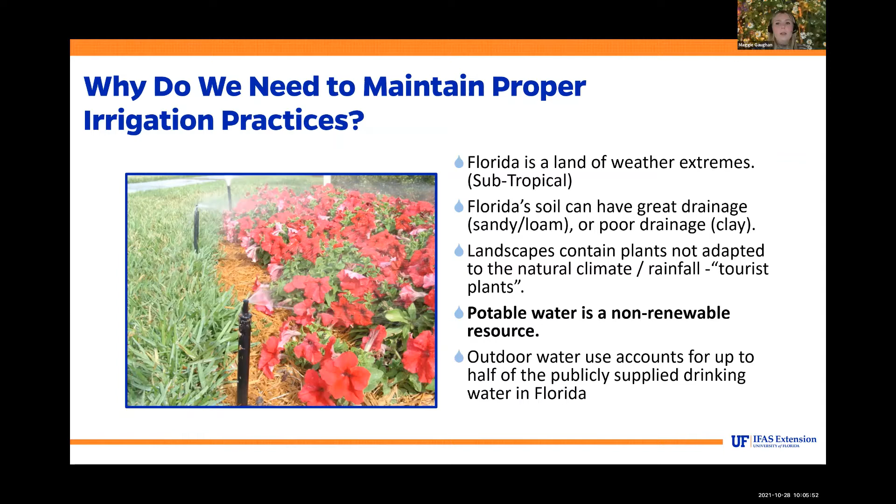So this does have an effect on the environment. This has an effect on our world. So we are drastically changing the landscape. So we need to be mindful of how we're using water because things are not taking care of themselves like they were before when we had all those wetlands that were able to filter everything out for us.

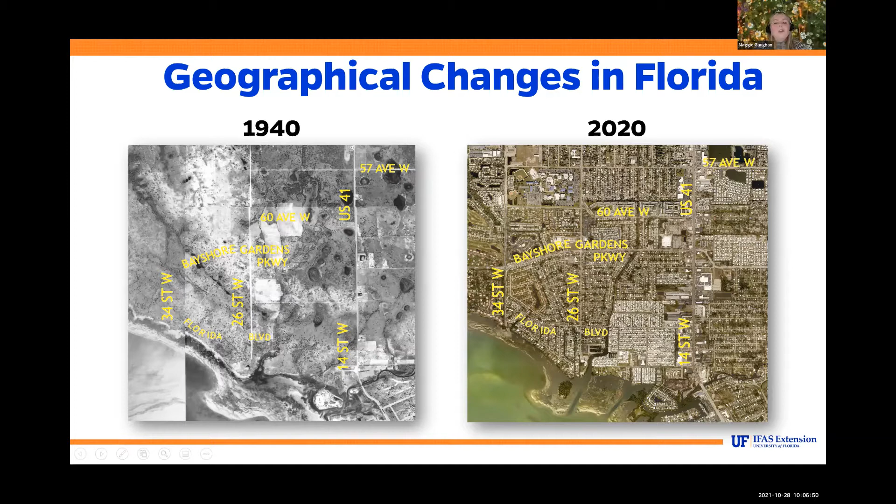And, you know, when we look at pictures of the globe, we assume that, oh my gosh, there's so much water, it's all blue. Well, really, that's all water. 97% of the Earth's water is salt water. And 2/3 of our fresh water is frozen in the glaciers. So we can't really access that yet. And then, of course, 1% of all the water on Earth is potable. So when it comes to irrigation, we really do need to be mindful.

And of course, I always like to remind people that it is okay to turn your system off. It's okay to go out there, turn it off, and then turn it on when you feel like you need it. But also, a functioning rain sensor will do that for you. So look for those signs of when to water. Pay attention to your lawn. You'll see folded grass leaves. You'll see that the grass kind of turned to like this gray blue color, or when you walk out in your lawn, your footprints kind of stick around. That's when you need to water.

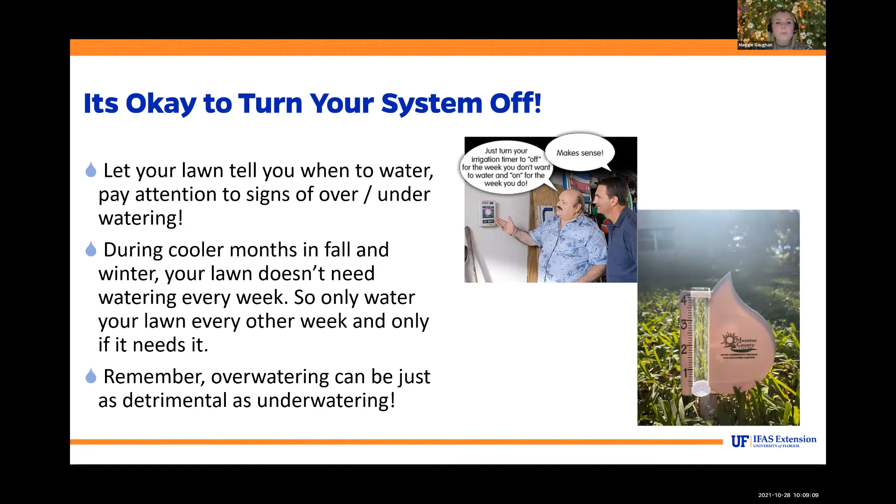So I want to ask this question, and I'm also going to ask it at the end to see how many of us remembered or learned something new, perhaps. So what is required by Florida law to be installed along with your in-ground irrigation system? All right, so it is Florida law to have a functioning rain sensor, or rain shutoff device, I should say. So rain sensor switches or other moisture interrupt devices, regardless of the age of your system, are required by law to be maintained and operational. So just because you have a rain sensor installed doesn't mean that you're good to go. You got to make sure that that thing works.

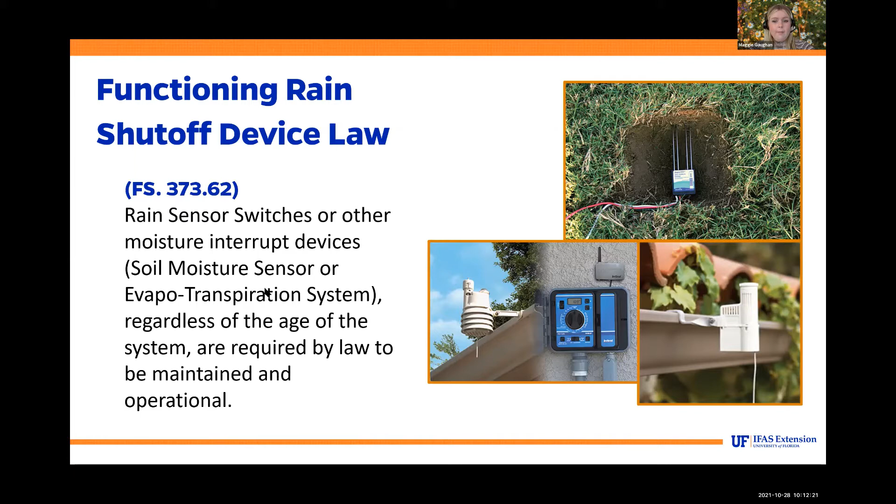All right, so why irrigate? Why do we even bother? Well, irrigation is intended to be supplemental to rainfall, yes, but sometimes we don't get enough rain, so therefore we need to irrigate. So when water is added into the landscape, it goes down, it gets absorbed by roots, but then it evaporates through the surface and transpires through the leaves. So rain ideally should be your #1 watering source, and we should be using irrigation as needed. So sometimes when we set things and just let it go, you might want to rethink that. Keep an eye on what's going on in the landscape, with the weather, and how much water you're really getting.

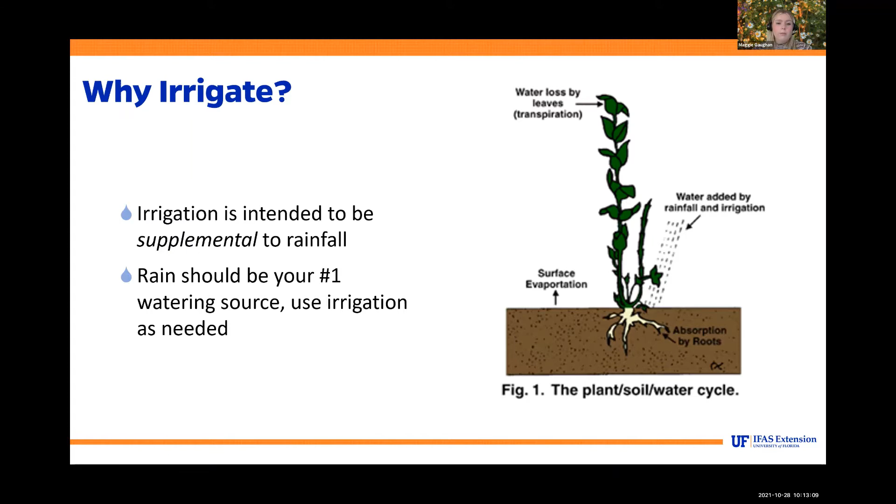All right, and here are some irrigation terms.

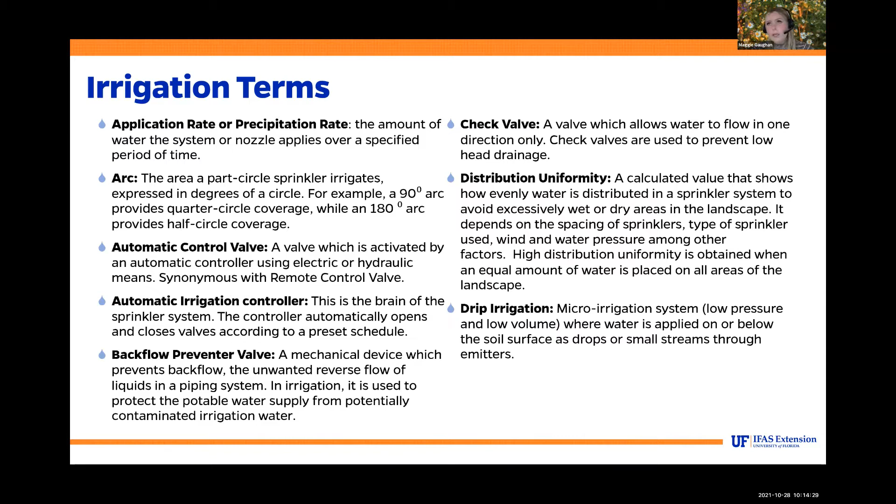So basically, it's just making sure that the water you've used to irrigate isn't getting washed back into your main supply that's going into your house. Nobody really wants to be drinking water that's been sitting out on your lawn, right? I don't think I do. So it's important to understand these terms before you start reading manuals or any design books or anything like that. You've got to understand what the terms are, right?

So here's some more. And one that we really like to use is head-to-head coverage. This is something we look for when we go out and do our inspections. This is the practice of placing sprinklers so that water from one sprinkler overlaps all the way to the next sprinkler head. This helps to increase overall system efficiency and prevents dry spots in the landscape. I'll go over this more with some nice graphics, but basically you want to make sure everything's overlapping so there's no areas that are missing that irrigation. You want to make sure everything's getting watered properly.

And micro irrigation, of course, love micro irrigation. That is a way to apply small quantities of water directly to or below the soil surface. This isn't typically what you want to use for turf grass, but for other plants, that would be a great option.

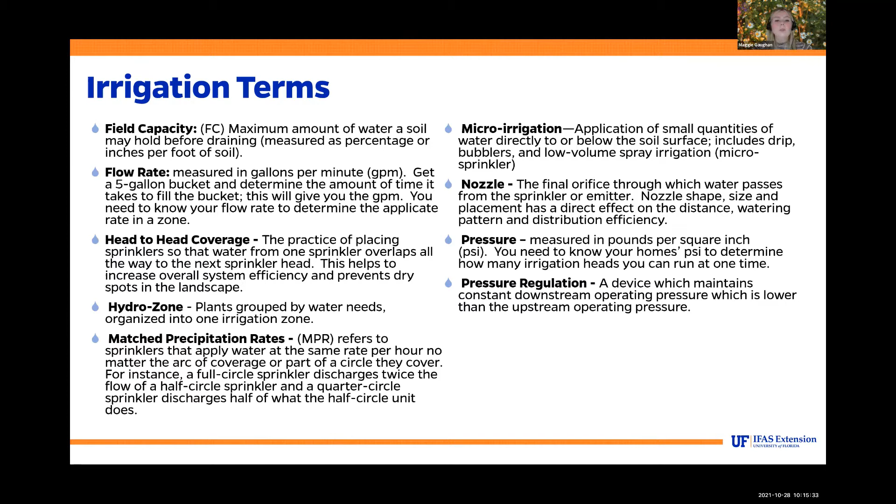All right, some more. Valves. Valves are pretty important for your whole system. They're kind of like the gates that let everything out, right? The valve is kind of like a faucet. They respond to commands from the controller. When valves receive the signal to open, water will then flow to the sprinklers and start to irrigate your lawn. When they receive another signal to close, they will stop the water flow.

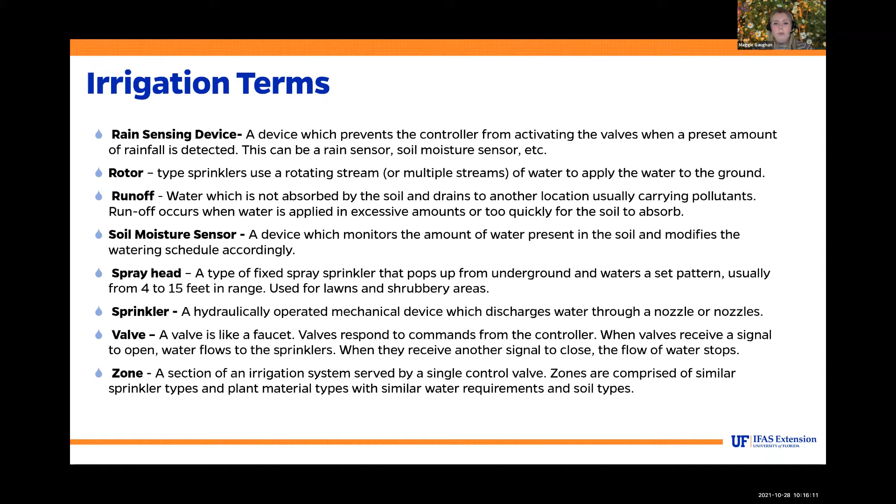All right. So a well-planned and maintained watering system will encourage healthy plant growth. It'll conserve water and also make your gardening life a little easier. If your plants are all healthy and happy and watered efficiently, you won't have to do as much. You won't have to worry about pulling plants out every weekend and replacing them. So if you do have an irrigation system right now, or if you're going to design one, make sure that you really think it through and that you maintain it as well.

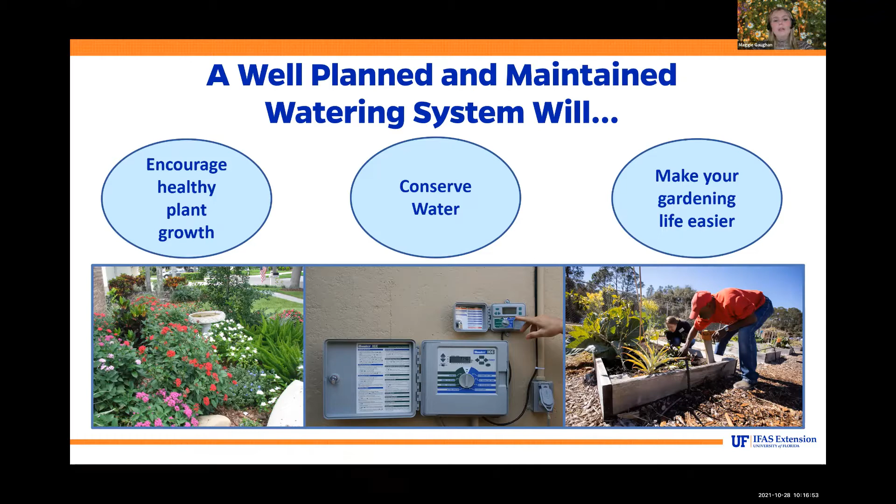All right, so to dive into the design aspect of everything, begin with the basics. You want to think of the bigger picture. What are the needs of your lawn currently? What are some characteristics of your soil, of your water source, things of that nature? So how much water do your plants really need? Some factors that determine watering requirements are your soil structure, soil texture, and plant needs. If you're putting in some Florida friendlies or natives, they may not need to be watered as much as some exotics or ornamentals that are not used to our landscape and climate.

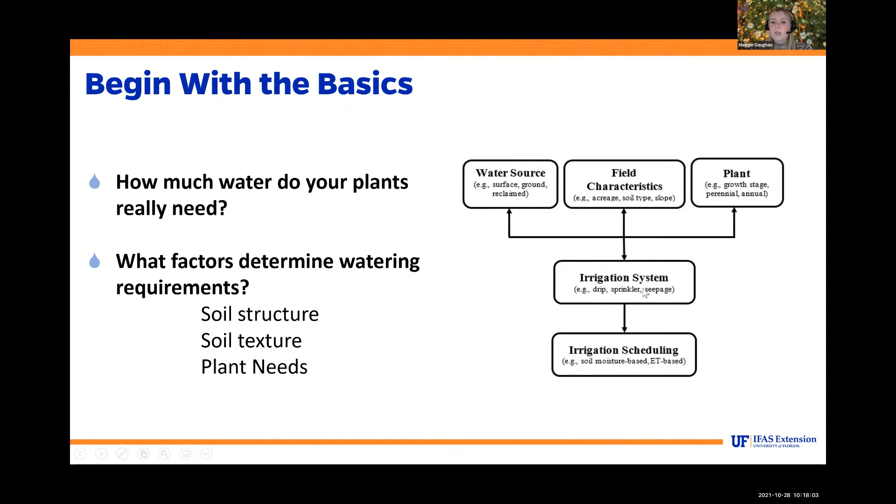So I really love this diagram here because it gives you a really good overview. You start with your water source, your field characteristics. You have a slope in your yard that might give you an indicator of where you should put heads, make them go downward rather than upward. Plants, irrigation system, and scheduling.

So some considerations for your irrigation system are system pressure. You definitely want to make sure that each zone is getting enough pressure to actually give you the output you're looking for, to make sure that it's going to hit that target, which is your turf grass.

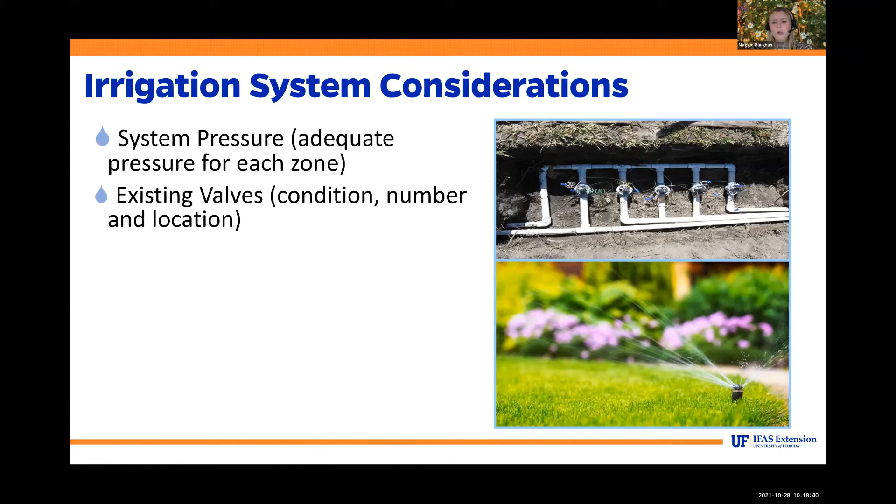So your existing valves can be a little tricky to locate sometimes, but typically in newer homes they are installed closer to the controller. Check out how many you have, check out the condition of them, and make sure they are functioning properly. And electrical wires, make sure you know where those are so that when you dig, you're not going to hit any and spark anything.

And how many zones, how many irrigation heads are within the zone? This is something you will need to do a little math about, and we'll get a little bit deeper into that. But basically you need to know what the pressure is and the area of your target.

And your controller, there's a lot of controllers out there, so go with one that you understand how it works and that maybe fits your budget. And your rain sensing device, make sure that you get one of these before you put everything in.

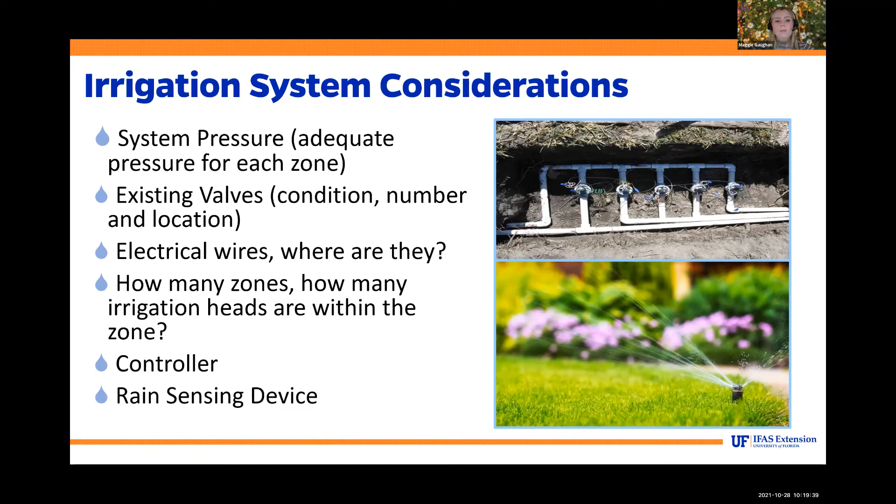Something also to consider is Florida-friendly landscaping principles. Watering efficiently is one of the major components of a Florida-friendly landscape because this will help to reduce stormwater runoff and protect the waterfront.

Soil texture is going to be a major component that affects the way you're going to design your irrigation system. So if your soil is really clay heavy, you may want to look into adding some more organic materials to improve drainage. Sandy soil has really great drainage, so things typically flow through sand quicker than they would clay. Loam is basically what you want—that's your ideal soil, and it has both clay and sand in it with organic material as well. So we want to shoot for loam, but it's okay to have some sandy and a little clay in your soil too.

Sand has big particles, so it's going to be better for drainage—water will flow right through there. Silt is small, kind of like loam. And clay is not the best for drainage; it's very tiny particle-wise, so it's not going to be that great for drainage.

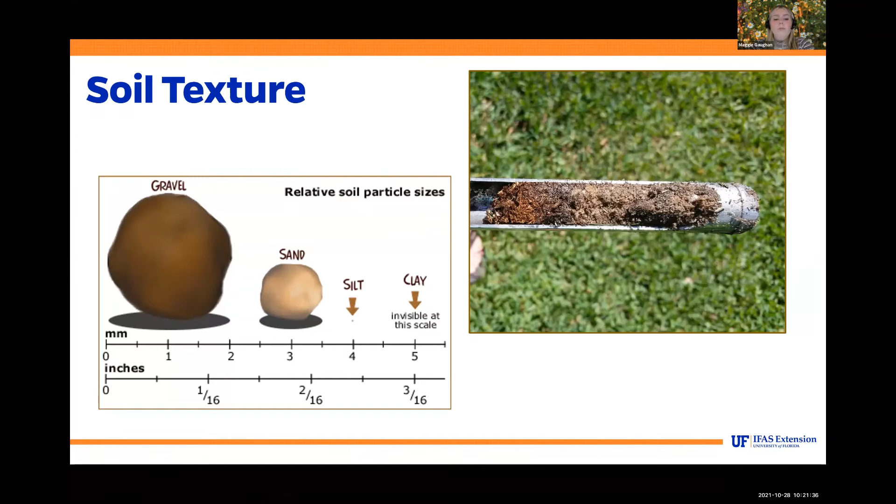And this is a soil core. So the mobile irrigation lab, when we go out, we do a soil core of your yard to see what you're working with, and sometimes we make our recommendations based off of your soil. So why is this important? It determines how the water penetrates the soil and how much water will remain in the soil.

With clay soils, the water typically stays at the top. With loam, you get that sweet middle where it goes down, but it goes a little wide. And sandy soils typically just go right down, right through it. So we definitely want to go for that medium middle ground.

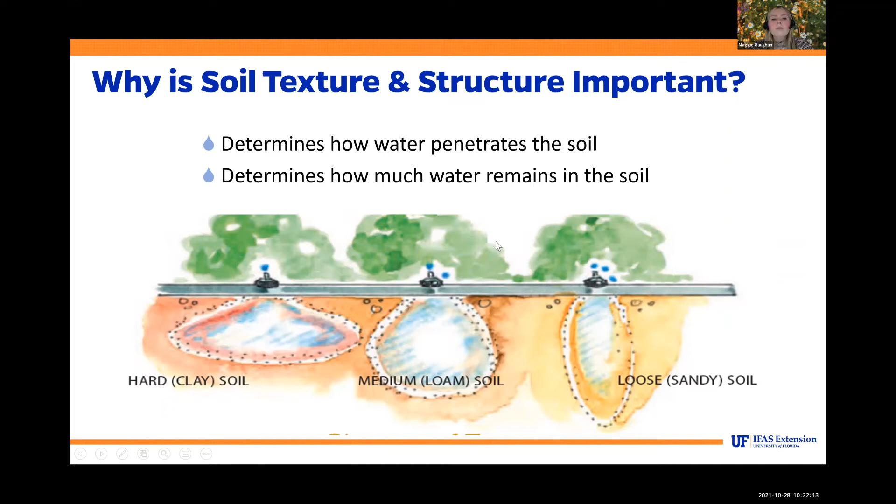And you want to consider composting. I think composting is great and more people should do it. We just started composting at my house, and I've been using a little bit of it on landscape plants, and they seem to like it. Compost is created when microorganisms break down organic matter like leaves, grass clippings, and kitchen waste. It basically adds more nutrients and texture to your soil than was previously there. So if you have sandy or really clay soils, I would definitely recommend laying down some compost.

All right, so you've got the plan for your irrigation system and you're ready to start digging. Well, before you start digging, you should call 811, because this is a free service that will locate your utility lines. This is what you want to do right before you're ready to install and get going on everything. It's important to call this number so that you don't damage anything that could really draw out your whole design and installation process a lot longer. So call—it's a free service.

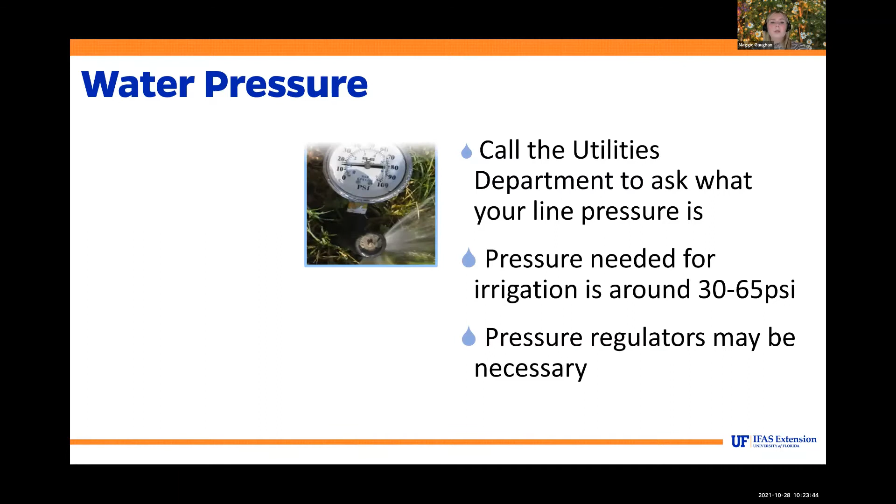All right, so water pressure. This is a super duper important aspect of your irrigation system, and a major component you need to consider when designing your system. This is going to tell you basically everything you need to know about your irrigation design and system. So call the utilities department, ask them what your line pressure is. They usually will know, and the number will differ depending on which jurisdiction you're in—Manatee County, City of Bradenton, whatever.

Pressure needed for irrigation is around 30 to 65 psi, and pressure regulators will probably be necessary. You don't want too much pressure in a zone, to where nozzles are popping off, and you don't want too little pressure, to where water isn't able to come out.

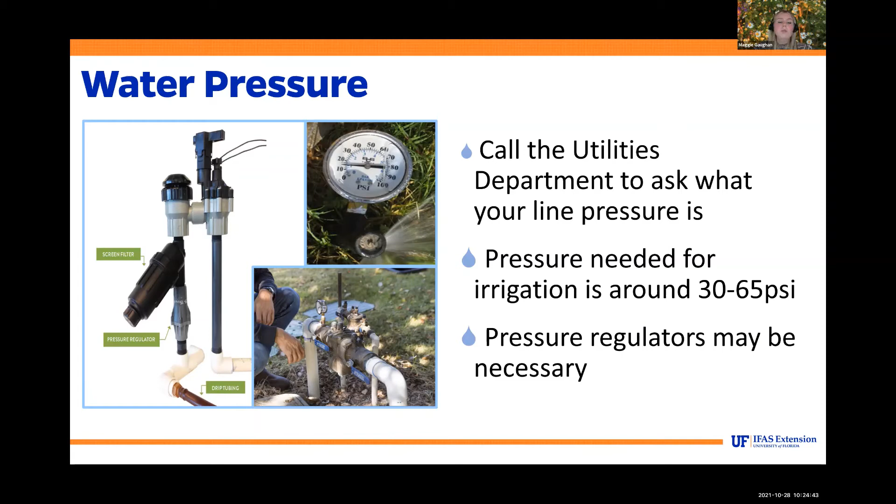This is where we're going to go a little more in depth on how to determine how many zones you should have. First things first, you need to determine the area of the portion of your lawn you'd like to irrigate. Area equals length times width, so length times width of that area will give you that number.

With that number, you need to find the gallons per minute, GPM, that the zone can handle. Your GPM is your area times the precipitation rate of the nozzles you're using, divided by 96.3, and that will give you your GPM.

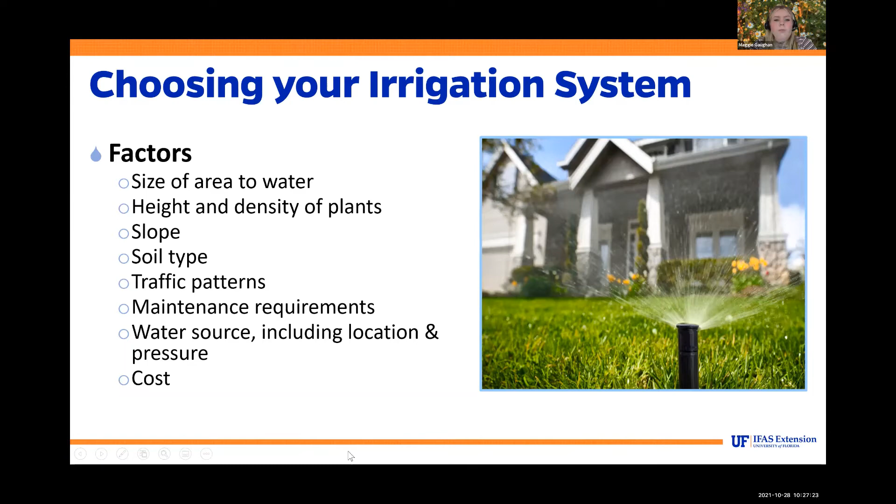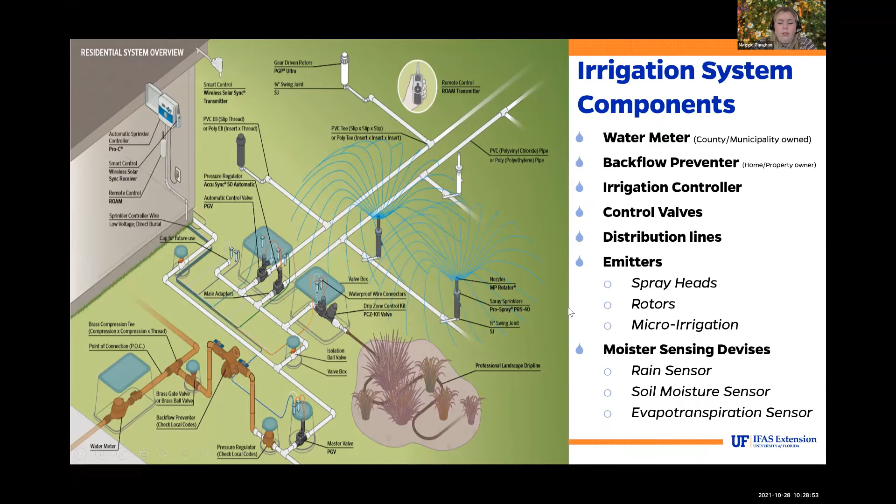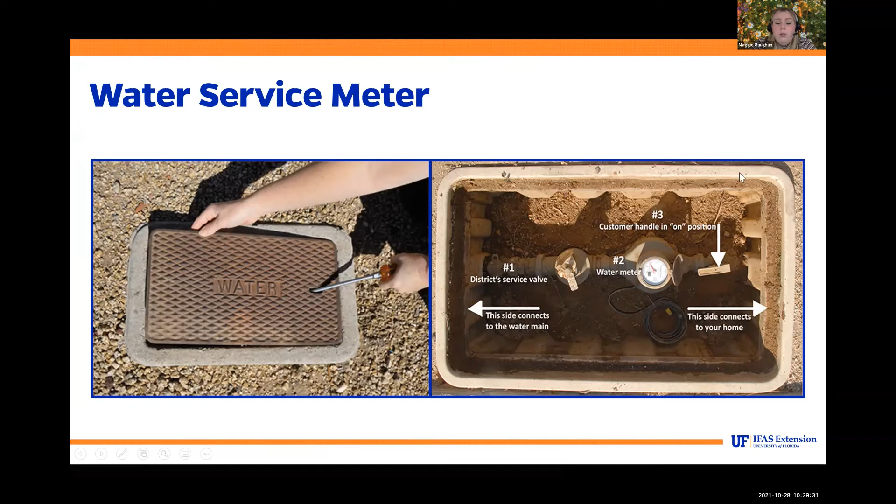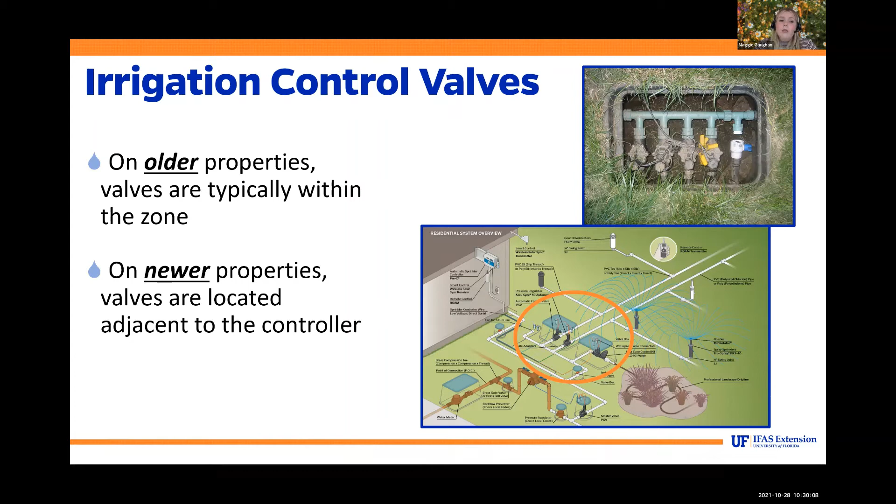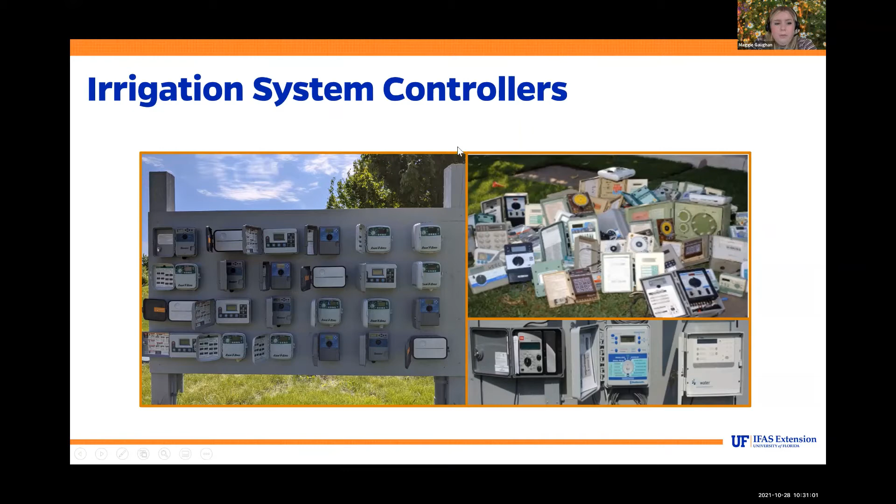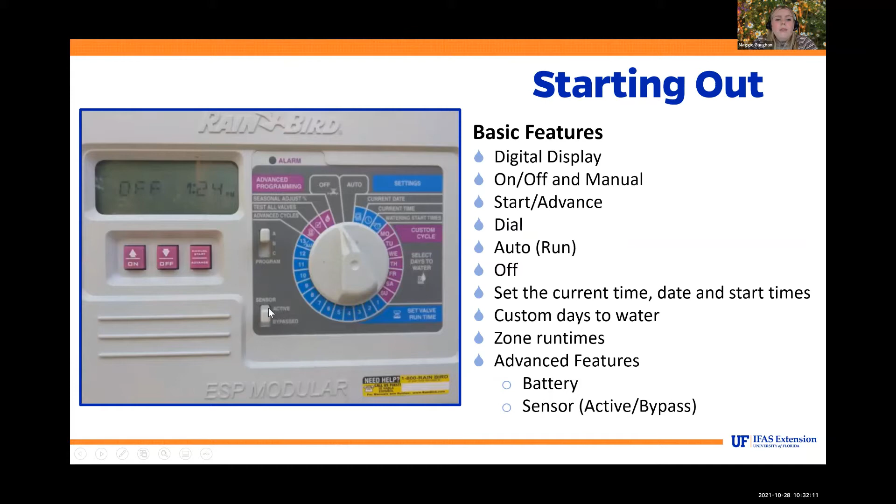Okay, so starting out, this is one of the most popular controllers that we see when we go do our mobile irrigation lab appointments. This is the Rain Bird ESP Modular. The basic features of this: we have a digital display, there's an on and off manual, you can start and advance your zones typically with a dial, there's an auto setting, there's an off setting. You can set date and time and set your days. So let's dive in a little deeper to the controller.

So, auto. With this setting, this will operate all existing programs entered automatically. So you have program A, B, C - some controllers will have less, some will have more. All programs contain start times, run times, and watering days. For a residential lawn, we really only need one program. There are options for different programs because maybe nurseries or larger farms need to utilize different irrigation times, but really we only need one when we're dealing with a residential irrigation system. So just be aware when you set this to auto that you know what your program settings are, because sometimes we have this on auto and we don't realize that we have every day set to run our irrigation system for like 3 hours. So just be wary of turning it to auto - make sure you are comfortable with your controller and that you know what is going to happen.

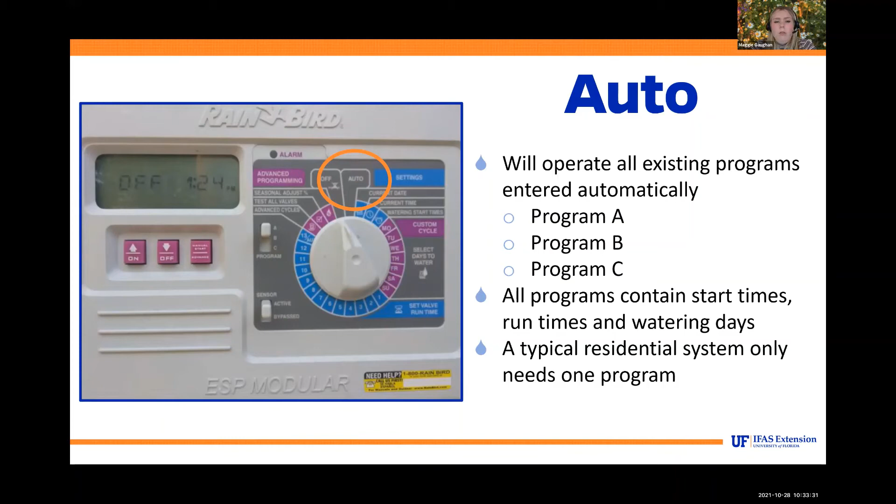All right, so current date and time - this is an important feature because you want to make sure that your date and time are correct. Otherwise, you may set your system to run at 5 a.m., but really it could be coming on earlier or later than that. If your date and time are wrong, it just may not be coming on when you think it is. So ensure that your date and time are right.

All right, and your start time. To adjust that, you would move the dial over to the start time, and then you would either add time or go down on the time using those arrows, the on and off / up and down arrows. So watering start times on a given program - there should be no watering between 10 a.m. and 4 p.m. Your ideal start time we typically recommend is like 5 a.m., so then your system should be done running by like 7 a.m. when the sun is starting to come up. You just want to make sure that water isn't evaporating - that will happen if you're watering midday. So early morning is what we recommend to be the best.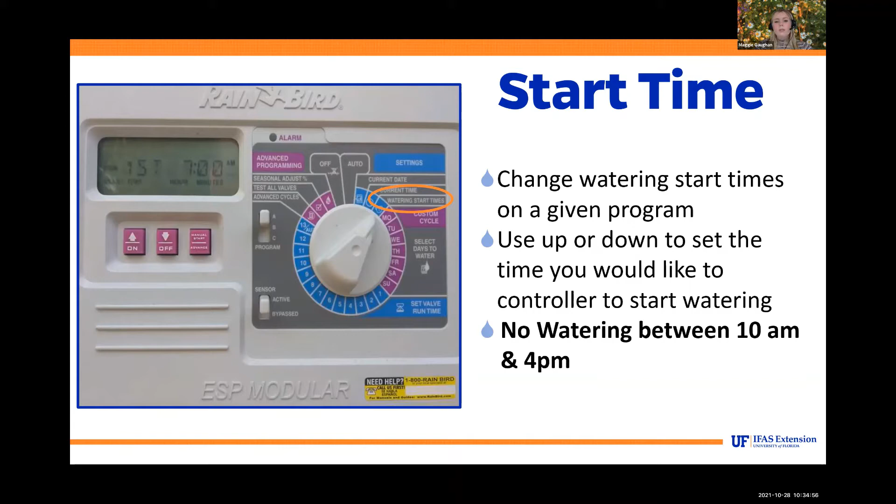So selecting your watering days. Depending on your address, your house number will determine what days you are allowed to water. If you have a house number ending in an odd digit, you can water Wednesday and or Saturday. If you have an even number house, you can water Thursday and or Sunday. We say 'or' because really once a week for most of the year is fine. These water restrictions are put in place by the Southwest Florida Water Management District, and they are the body that governs our water for Manatee County.

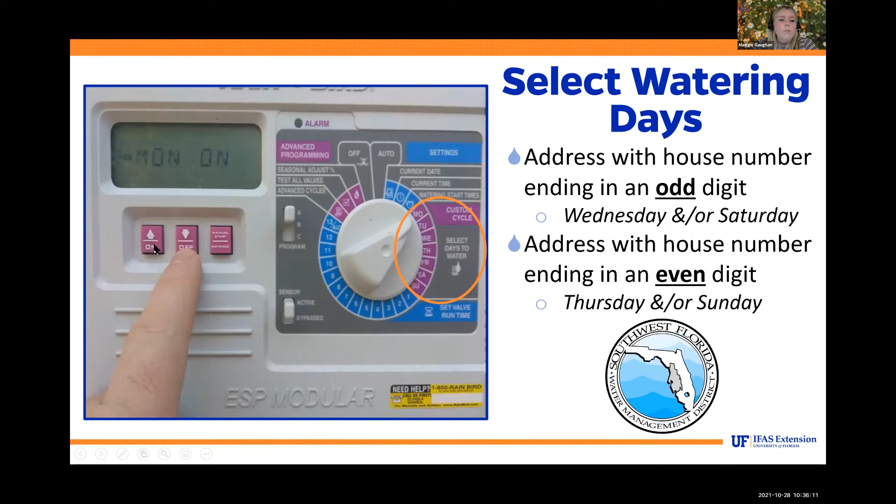Make sure when you're going to select watering days that you are going by these watering restrictions. How you would do that is just slide the dial over on this particular model, and then you either will turn on or off. Press the up arrow to turn it on, the down arrow to turn it off.

All right, so setting run times. You want to change run times for each zone. Each zone will be a little bit different than the next, right? Make sure that this is specific for your zone and it's not just a golden number that they say rotor should be 60 and spray head should be like 30. Well, that's not always the case. If you have a tiny little square, you should never be running it for like 60 minutes. That's a lot of water.

This controller can actually hold a lot of zones, up to 13 zones, and it's different for everybody. So how to determine your zones: you have your controller, and usually either behind it or underneath it there's a little cover you can pop off and you can see all the wiring. There'll be some wires that are connected and they'll have numbers above them, and those are typically your zones. The digital display, when you go to select the zone, will either show the zone number or refer to them as stations or valves, and it'll say how long it's running for. Of course, you can change that with those up and down arrows.

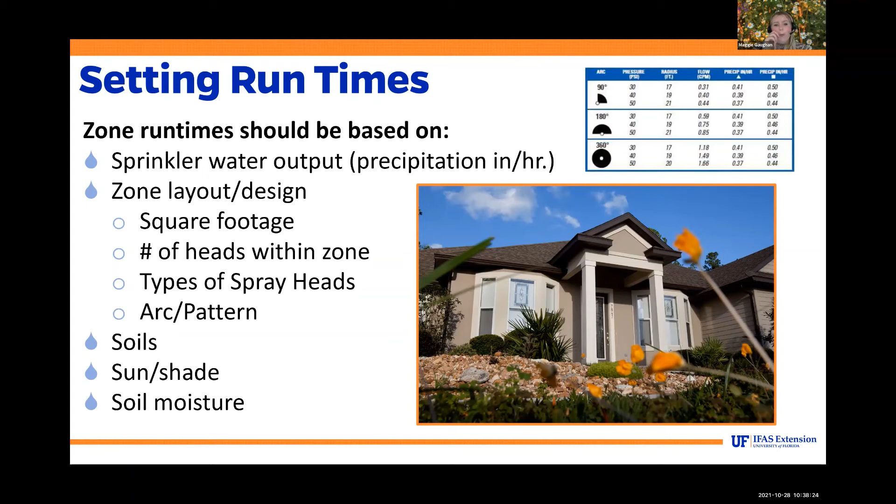There is a fairly easy way you can do this—you can calibrate your own zones. Most of us have those cupboards that you open up and Tupperware just pours out, right? So I'm sure you have some of these at home that you can use to calibrate your zone, or you can use some tuna cans. It just has to be something with a flat bottom that's fairly shallow. Or we have something similar to this, kind of little collection cups that have a stake in them, so you can stick them in the ground pretty easily, and then they have a measurement on the side so you can see how much water is being collected.

What you do with these is per zone—you don't do your whole system at once. You're going to set cans or cups by each head in the zone you're calibrating to catch the irrigation water. Keep your irrigation on until the cans or cups collect three-quarters of an inch of water. I would do this in increments of 10 minutes so you're not wasting too much water, and check them so you can see how long it takes. So if it took you about 5 minutes to collect a quarter inch, you may want to multiply that by 3 to get 15 minutes, which will get you to three-quarters. So this is kind of a fun little way you can calibrate your zone.

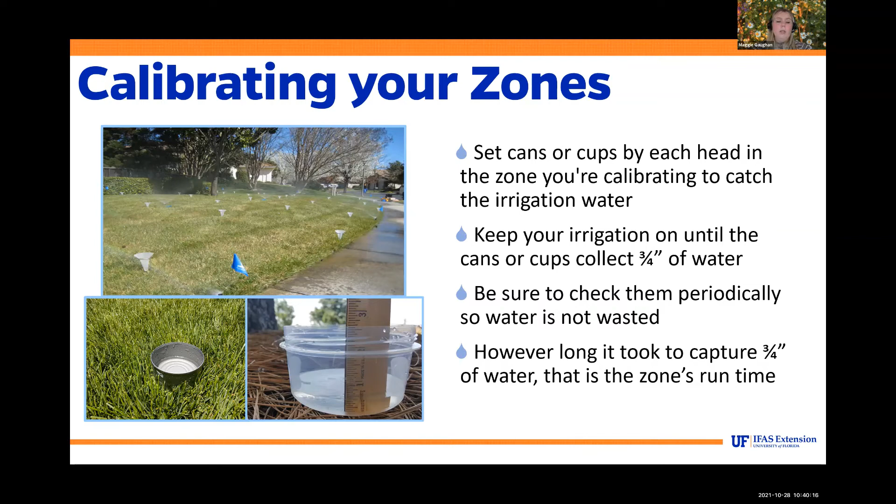It's important to calibrate your zone because you do want to make sure you have uniform coverage. For good coverage, you want 100% overlap of the heads. Lack of 100% coverage may be due to improper head spacing or wrong spray head throw distance, kind of like in this picture here. I did not put this here as a good example—it's just kind of a bad example, and I see this a lot, unfortunately. So you have rotors in this yard when ideally it should be spray heads because of the way everything is shaped. This spray head here is kind of going over the sidewalk but still watering the sidewalk—that sidewalk is drenched. And this rotor in the back corner, kind of catty-corner to the garage, isn't really getting much.

So unfortunately, this isn't getting good coverage, even though the grass is green, but maybe it's been rainy. Really not great coverage there.

Lack of 100% coverage may also be due to not enough heads in the zone. And if your water pressure isn't correct, if it's a little bit low, then it's not going to be emitting as properly as it would if you had proper pressure.

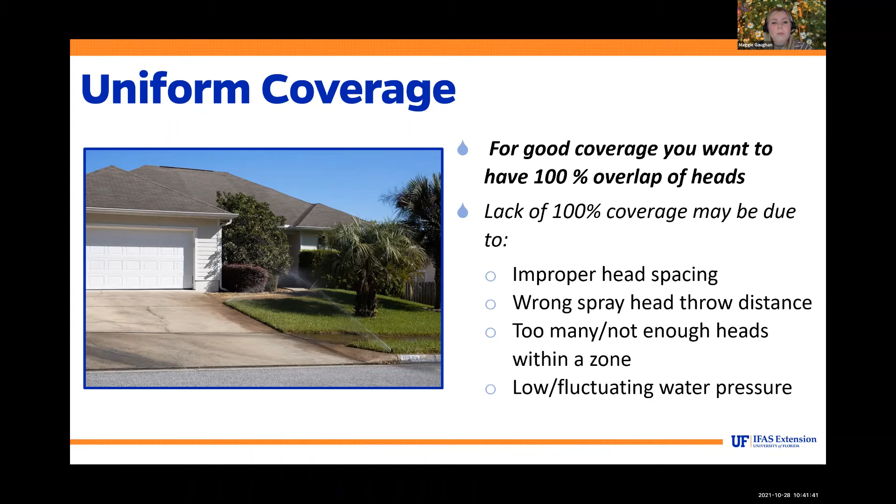Okay, so question number 2: what type of irrigation is best for landscape beds?

All right, so this is a great graphic of an effective irrigation zone. You can see how the design is very efficient in the way that these zones are structured. Typically, you want to group the different corners and areas of your lawn together. So you can see area A, zone A, is not paired with D - they're separate zones. Because if area D and area A were one zone, there's no way this backyard would be getting enough irrigation, enough pressure to irrigate properly.

And this also is showing you the head-to-head coverage. So let's take a peek at area B. These gray circles are showing us sprinkler heads, and it's showing the throw pattern that they have. This looks like it's a 270 that's going around. And then you also have one across from it that's meeting it, and another one over to the left that's meeting it around that bush there. So everything is overlapping. I know it can be a little tricky to look at all these lines, but you can get the gist and see how they're all overlapping.

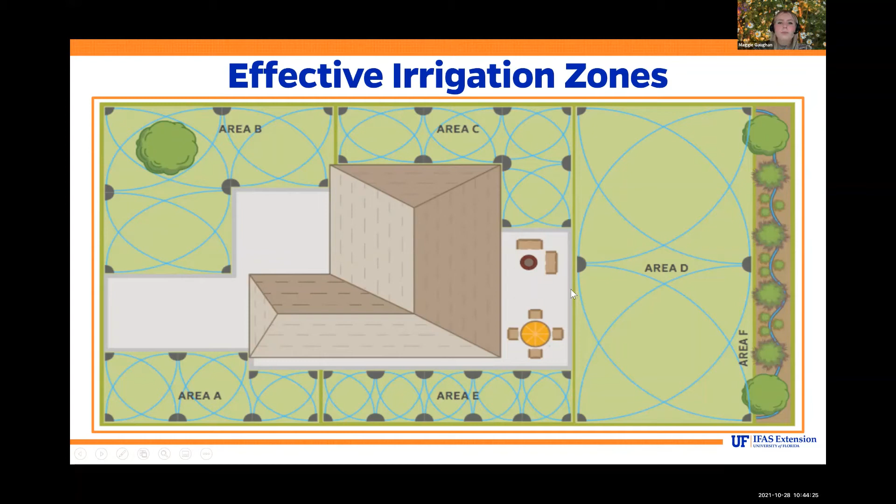Some more graphics for head-to-head coverage. So in the middle here, we have some 360-degree sprinklers that are creating this full circle. And then we go to the top left, that's about a 90-degree sprinkler that's hitting it from the side, 90 degrees. Then you have another one in the other corner. And then you have your 180s creating a half circle. So you can see that there aren't any spots that are not getting irrigated. Everything is getting covered and saturated with irrigation.

So visually, when you see it out in your yard, you're going to see the water hitting one head and then hitting the other.

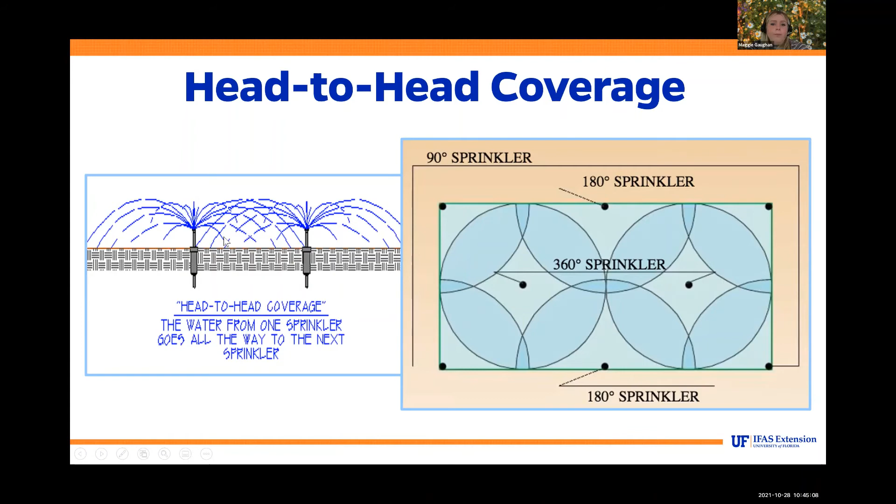All right, so potted plants - sometimes people put micro irrigation in potted plants, but depending on the size of them, you really just should hand water them. Potted plants hold more water because they're in a pot. So to have it regularly irrigated with micro irrigation may not be as beneficial to the plant as you think it is.

In the landscape bed here, use micro irrigation as needed. So this landscape probably doesn't need any because you have some natives in there and they're pretty established. Established landscape plants don't need to be watered like your turf grass does.

And of course, for turf grass areas, you want to use spray heads or rotors. You never want to use the drip line or micro in the turf grass area because it will get a little splotchy and it will not be efficient and make it green and pretty like we want it to be, right?

All right, so let's dive into spray heads. These are fantastic, great for a typical residential lawn. Don't get me wrong, these are great, but also they are using more water - they are still using a good bit of water. So just be mindful of using these as well.

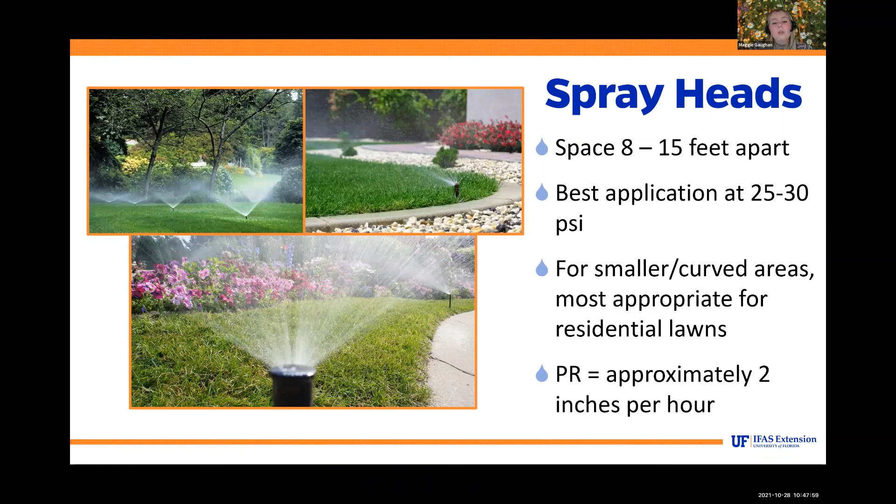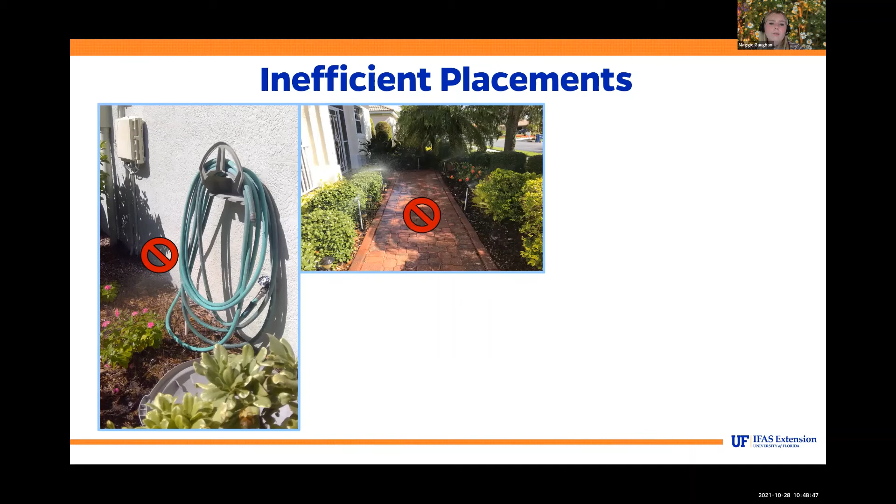And this is really common. We see this quite a bit along a walkway in landscape beds again, but there is a lot of water going onto that hard surface that isn't gonna help it get any bigger. And then blocked by a plant. This happens a lot. Just be mindful of where your heads are and where you put plants. And also, this plant probably isn't going to like being irrigated over the long term.

And along sidewalks in these strips, there's special nozzle tops that you can get for sidewalk areas that are called S strips, and they typically shoot out more so like a bow tie, so that you're not getting that full fan, you're getting more so of a tighter spray that's just going to hit the grass rather than the sidewalk and the road.

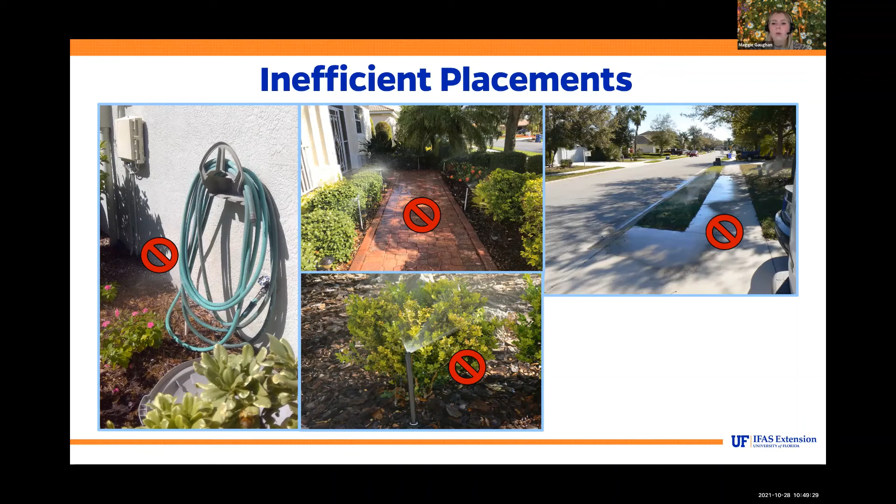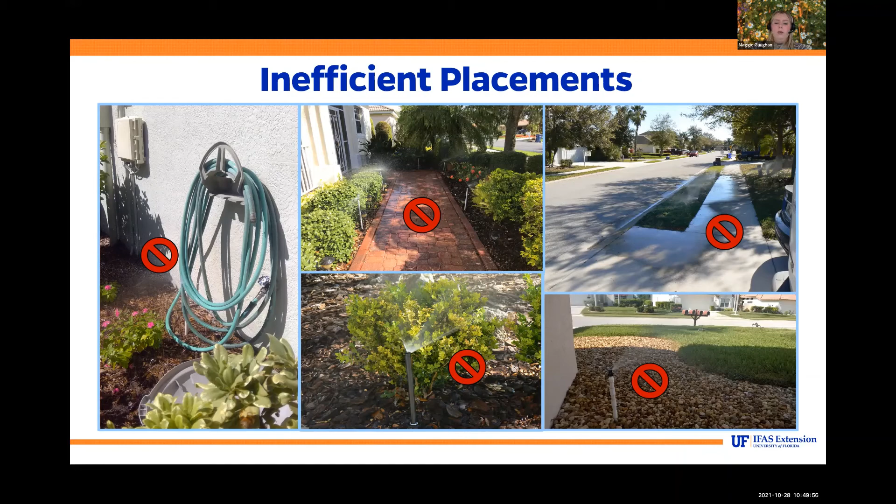And here's another one, rocks. I'm not sure what they are trying to grow in the rocks, but that sprinkler isn't going to do much for them. So just be mindful where you're installing your spray heads. Make sure that they're not being blocked by any objects, that they have a purpose when you put them in. And remember that their purpose is to irrigate the turf grass. All right, so let's dive into rotary heads.

All right, so this is a rotating sprinkler that is better suited for large open areas, using a higher pressure to disperse water in an arching stream type jet spray. So rotors, you want to space, this is a pretty large bracket of numbers, but 15 to 100 feet, definitely more than 15 feet, I would say. But these are best applied at 45 PSI or higher. A lot more water is being used with these guys. And again, these are for large open areas.

A typical lawn doesn't really need these, especially if you have an oddly shaped grass area. If you have just like a big rectangular square area, yeah, that might be a little bit more beneficial for you to have rotors. But with curved areas and landscape beds, just go with those spray heads. It's very easy to waste water with the rotors.

And these take approximately half an inch per hour for their precipitation rate. So you typically need to run a little bit longer, even though they are using more water. The way that they're spraying things isn't as fast as that fan type arc that you have from the spray head.

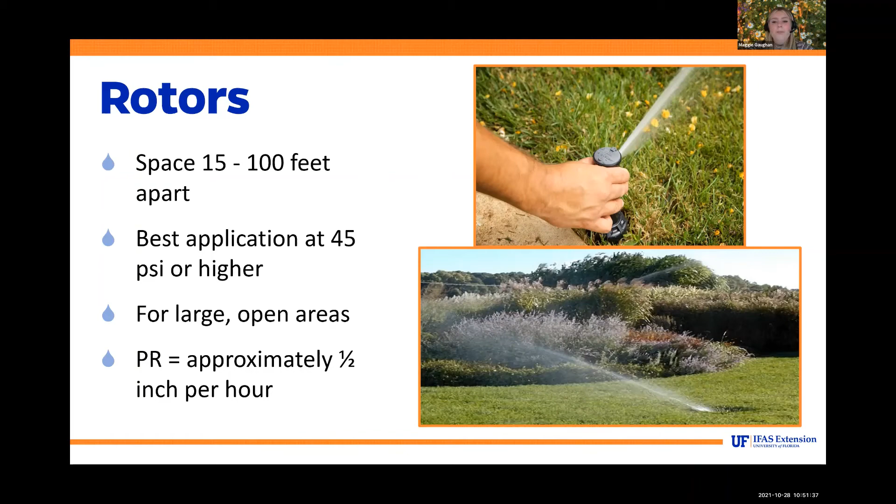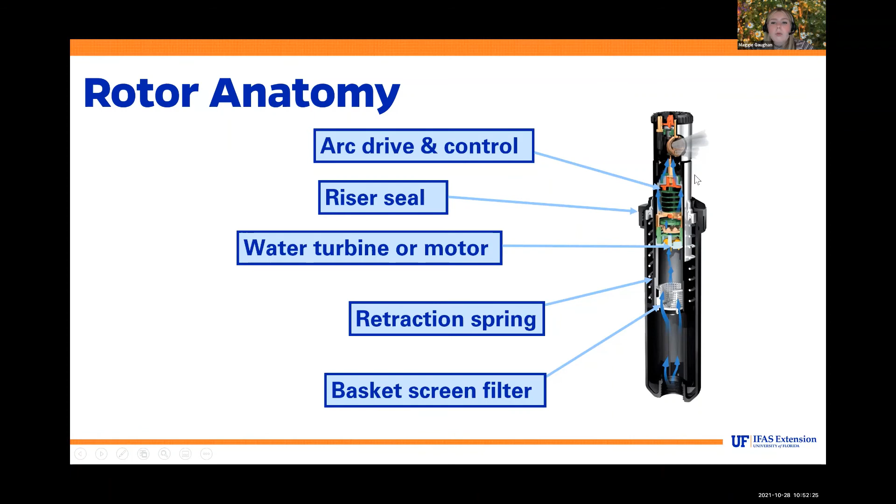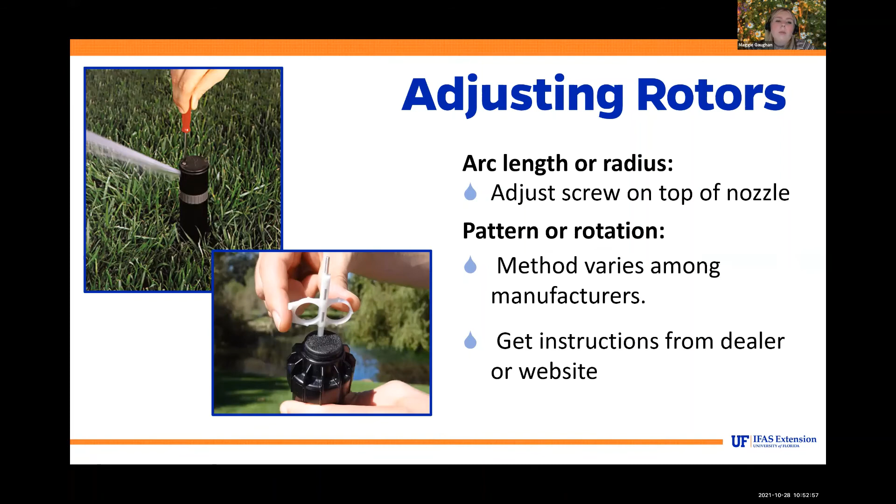And adjusting rotors is fairly simple. There's usually little tools that can come with them or can be purchased online. So your arc length or radius, just adjust the screw on top of the nozzle. The pattern or rotation, this varies among the manufacturer of your sprinklers. So I would recommend going to their website to see what they tell you to do.

And here are some inefficient placements of rotors that you should avoid when designing your system. So a big thing that I see when I go out with the mobile irrigation lab is people will have rotors, but they never really look at what the rotors are spraying. And so a lot of the times they're hitting objects and not really watering anything.

All right, and you can see that this rotor here is tearing up these landscape plants. So if you have a plant that looks a little similar to that, for some reason the shrub has kind of a hole in the middle of it, you may want to take a peek at your sprinklers because your rotors might be beating that bush up.

And this one here looks like maybe it's not getting enough pressure because you can see it's kind of misty. It's not very full, this stream. And it's going over the sidewalk. That sidewalk is very wet and could be a hazard. People could slip pretty easily on that. So just make sure that it's not going over any hard surfaces.

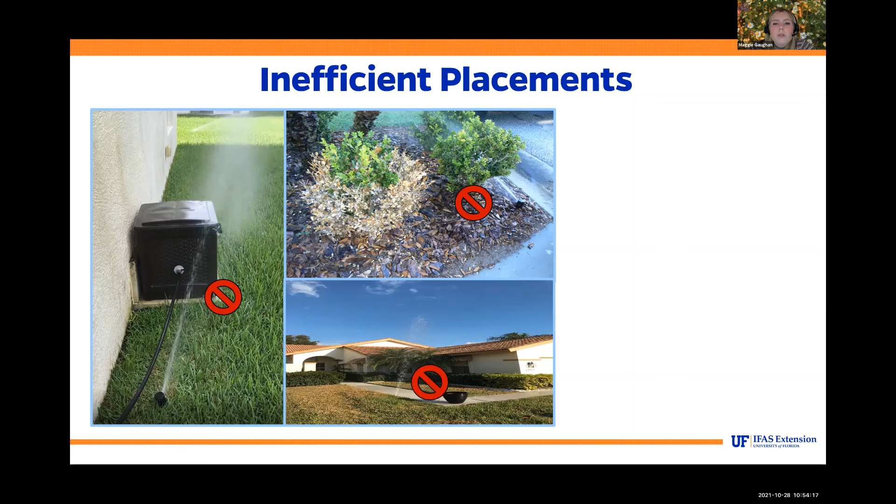And make sure that your rotors are facing the right way. These palms here don't really need to be irrigated, but this grass on the other side of these sprinklers definitely looks like it's missing out on some water. So make sure when you're installing these guys that they are pointing in the right direction. And again, be mindful of these hard surfaces. Make sure that you're not watering the road or your driveway.

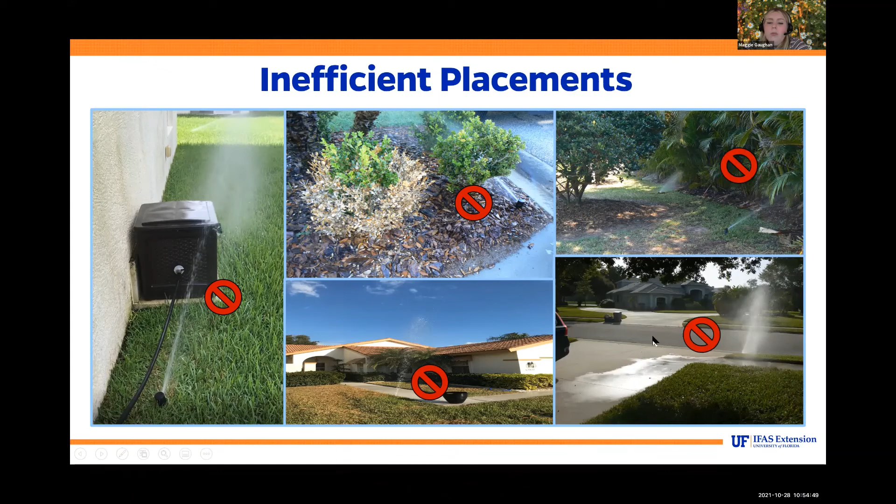All right, and micro irrigation. So there are a few varieties of micro. So you have micro sprayers. You have drip tubing, which is the most common we see. You have little drippers, and you have shrubblers or micro bubblers. The micro bubblers tend to output a little bit more water. Drip tubing is really nice because it just slowly drips out the water over time so that you're not getting a whole rush of water coming out into the root zones.

All right, and you can see in this yard here along the driveway in this landscape bed, they have some spray emitters taking care of those landscape plants. And you notice that they're not in the grass area, which is good because you should not be watering your turf grass with micro irrigation. So micro irrigation is a way to water plants using low pressure and low flow rates. Usually operates at 15 psi and emits 60 gallons per hour or less.

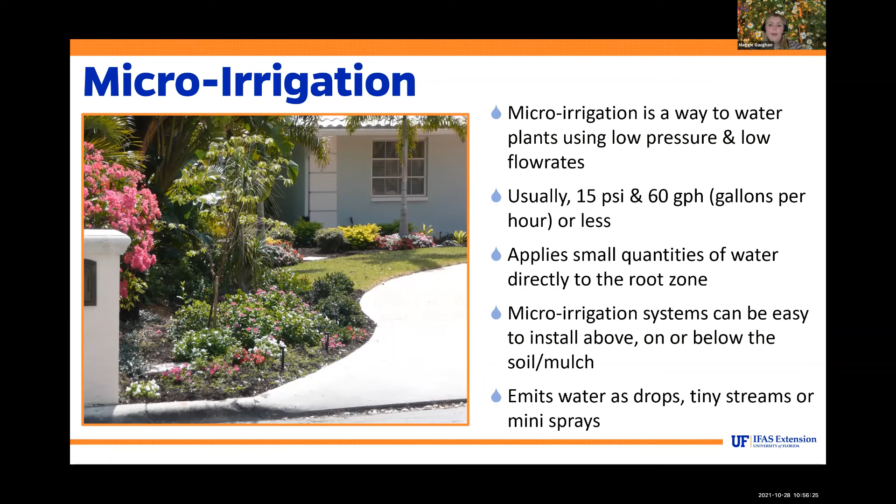This applies small quantities of water directly to the root zones, and these can be fairly easy to install above, on, or below soil or mulch. And so pictured here, my brother has a bonsai garden, and him and my dad installed a micro irrigation system. He has some shrubblers watering his precious bonsais that he loves. So micro is great for small gardens and container gardens, like bonsais, maybe some hanging baskets, and of course landscape beds.

So some advantages of micro irrigation is there's a wide variety of uses. It efficiently reduces your use of water. You may not have as many weeds due to not overwatering using micro irrigation, and it also reduces pest problems because you're not welcoming a super duper constantly moist environment.

And some disadvantages of micro irrigation, because there's always a little bad with the good, right? Some parts can get pricey, and also things are smaller, so things can require a little bit more maintenance because filtration is important, and filtrating things for small tiny emitters can be a little bit tricky. And because you have all these small pieces, it can also be easily damaged.

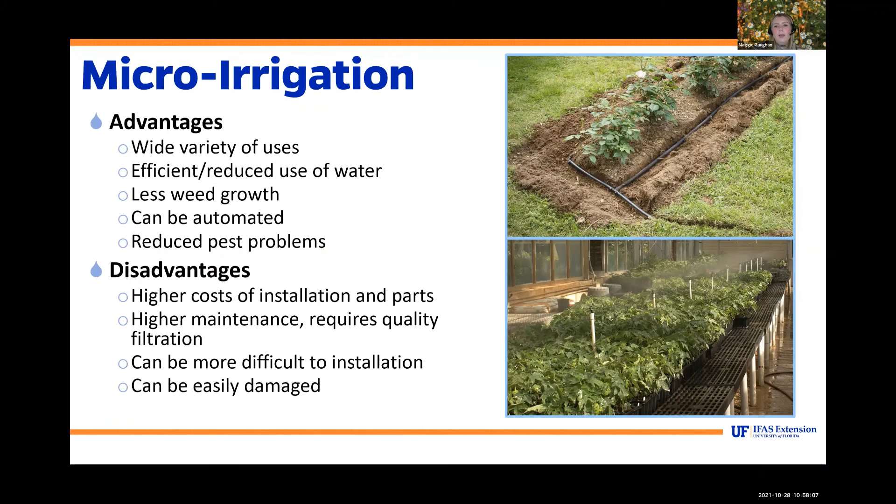And so with that being said, we're coming to the end of the webinar. So if you are thinking of redoing your irrigation system or putting one in, I do want to talk about some rebate programs that Manatee County offers. So these rebates are open to people that are Manatee County Utilities customers. So unfortunately, if you're not, then disregard this. There's some other requirements for this program, like your home has to be built before March of 2003.

But go to the mymanatee.org website to learn more about the rebate programs, but here's an overview of some of them. So this one, if you decide to install an alternative water source, they will provide you with a rebate of 50% up to $500. So this is for people that want to use a different water source rather than potable. So maybe you have a lake in your backyard and you want to use that water for your irrigation, that could be something. So these are for water sources.

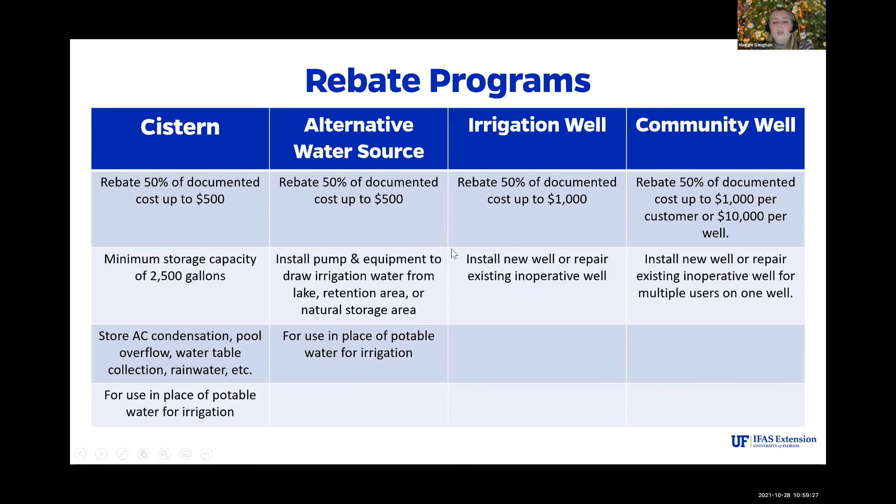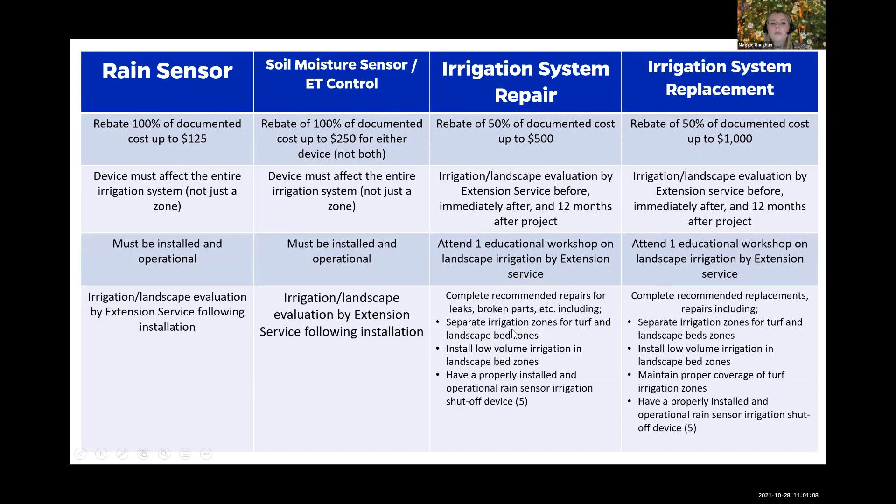And then there's also one for the landscape. So if you decide to cut down on some of your turf grass areas and put in some landscape beds with some Florida friendly and natives, this could fall into there. Along with having us come out to evaluate your landscape before and after your installation, there's also another requirement of having to take some of our classes, and usually it's something like this. You watch one of our webinars, or once we decide to ramp up our in-person classes, you need to attend one of those at least.

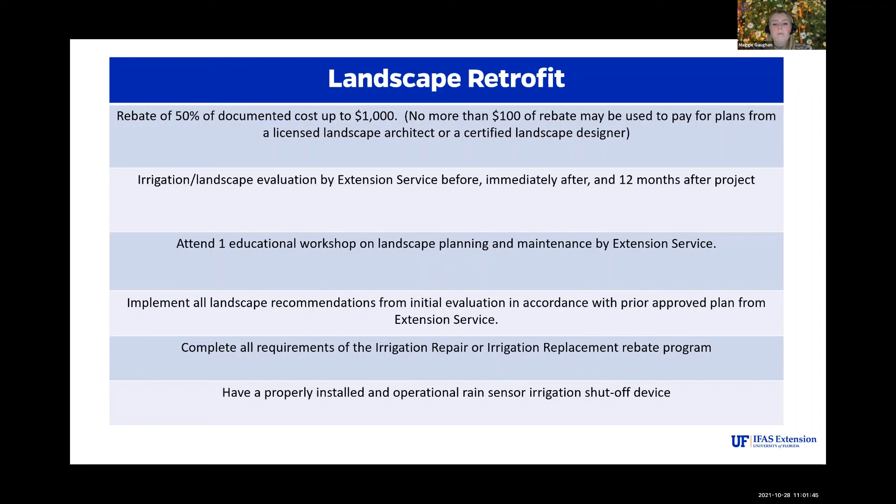And for more information, the UF extension publications are excellent. You can go to solutionsforyourlife.com or edis.ifas.ufl.edu. But the easiest way to find a publication on something particular, you could type in vegetable gardening UF on Google, and it'll bring up the publications. So basically just your topic with UF at the end will bring you to whatever you need, including irrigation. They have a lot of information on irrigation design and compact soil, things of that nature.

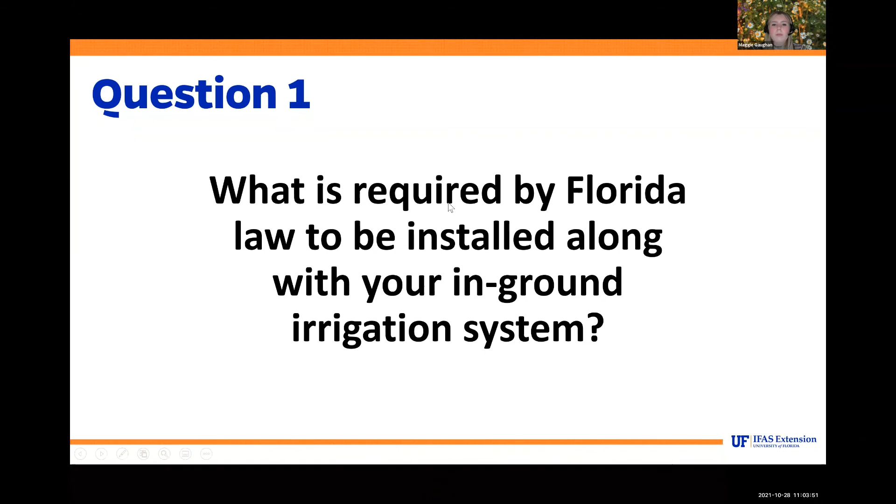And let's ask these questions again. So question 1 again, what is required by Florida law to be installed along with your in-ground irrigation system? It is the rain sensor. Great job. Okay, what type of irrigation is best for landscape beds? Micro irrigation, or none. Depends on what your plant needs are. But yeah, so micro irrigation, fantastic.

All right, so if you didn't get the hint, this is your sign to inspect your irrigation system and to book an appointment with the mobile irrigation lab. And on the next page will be my contact information. So if you are designing your system, feel free to email me or call me. You can pick my brain for any questions you may have. But definitely recommend, if you do have an irrigation system, run the whole system and kind of reminisce to the days when we were kids playing in sprinklers, and just put your bathing suit on and some boots and go walk out there and see what is happening, and book an appointment with us so that we can help you out.